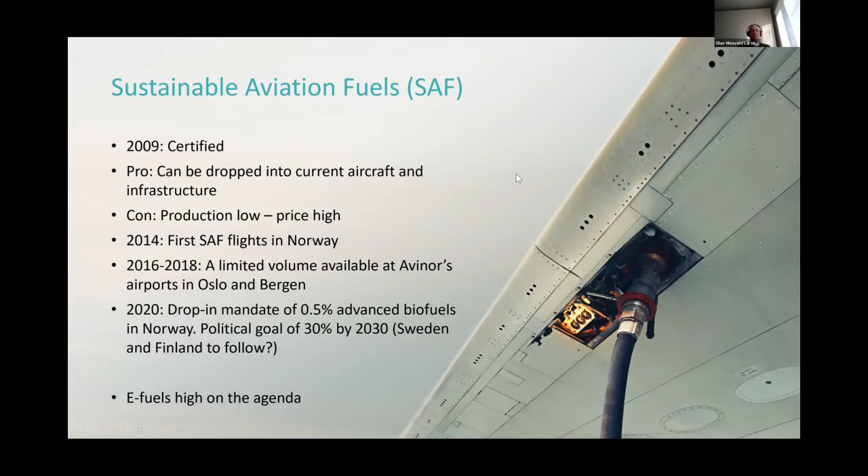So what do we mean by electrification? We have defined it as an aircraft with at least one electric motor for propulsion in the air. That electric motor will need to get its electricity from somewhere, and that could be either a fully battery electric

energy source. It could be variants or different types of hybrid solutions where you have both battery, but also some kind of generator based on liquid fuel.

And the third option that is getting more and more attention is adding a fuel cell, which is an advanced battery in many respects, running on hydrogen or some very hydrogen dense material, providing the electricity for the electric motor.

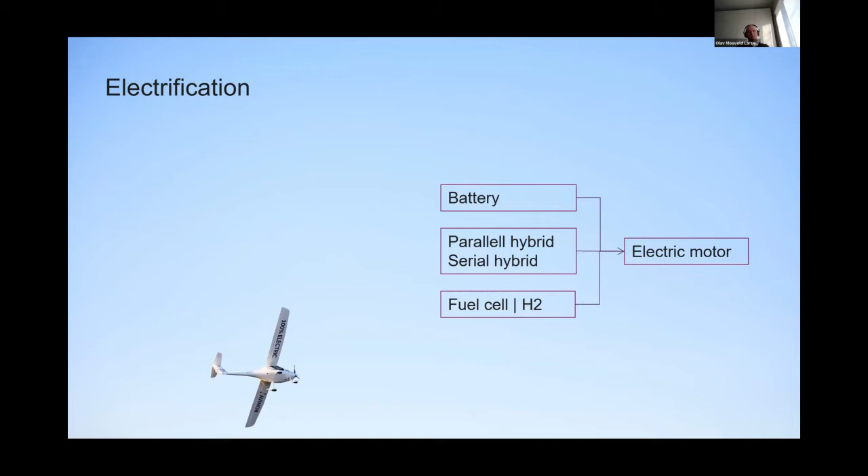We have been looking from Avinor's side into this since 2010, but more systematically, and spent quite a few resources on this since 2015. The reason for 2015 is that I think it was July that year

Airbus flew this little aircraft across the English Channel. That's a flight that's 72 kilometers long, and that's longer than many of the domestic flights on the short-haul network in Norway. So we realized that this could be an interesting technology path to monitor.

There are currently more than 200, as far as we know, projects around the world working on electrifying aircraft of all sizes and shapes. In the remainder of my part of the presentation, I will pinpoint some of these for you to get an idea about what is going on, the whole spectrum. But obviously there are many more I cannot talk about in this short speech.

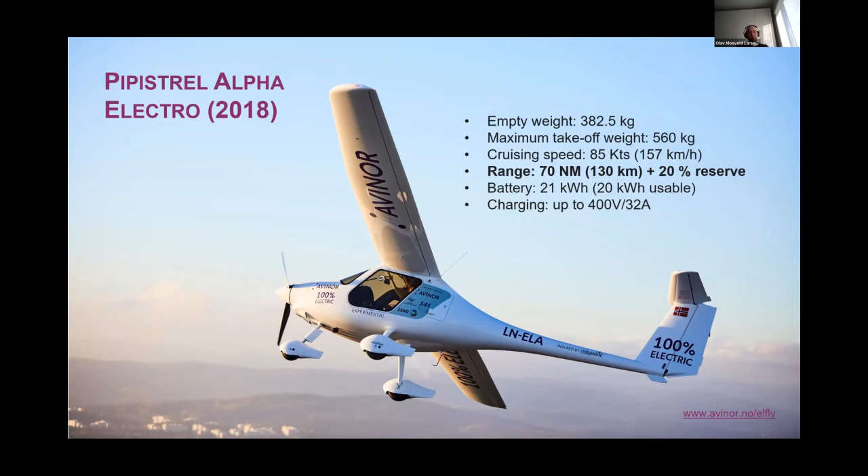So this is an example of an aircraft that is already flying. It's a 2-seat aircraft with a 130-ish kilometer range, but it's very light, and it is designed for training, pilot training, and also some recreational use. There are a couple of producers or OEMs in this domain, and this is also probably the segment where it is most easy to get these aircraft certified.

There are a lot of uncertainties here, obviously, but it is likely that what we will see first in regular passenger traffic is a 19-seater, and that has to do with the certification schemes. Up to 19 seats, aircraft looking maybe like this.

This is a Swedish aircraft designed in Gothenburg by a Swedish startup. It's fully battery electric, but it is also likely that one could see aircraft of this size and shape with, let's say, fuel cells, but still with fully electric motors, and they will have a quite limited range. That's what we expect.

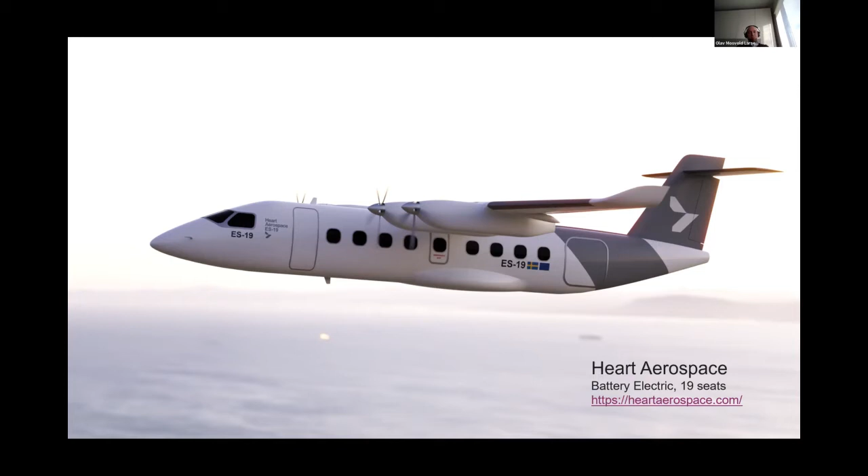Another example is a hybrid aircraft. This is a French producer, VoltAero. They are test flying their systems in a small aircraft on the right hand side of the screen. It is flying. It has both an electric motor and a fossil engine. On the left hand side is what they aim to actually produce in different versions, somewhere between 3 or 4 different models with 4 to 10 seats depending on the model.

As you notice, it's only one propeller in the rear of the aircraft, but that propeller is driven by a motor that has both electric and fossil power. So this is a hybrid solution, and the advantage with hybrid solutions is that they increase the range of the aircraft while we're waiting for batteries to get better.

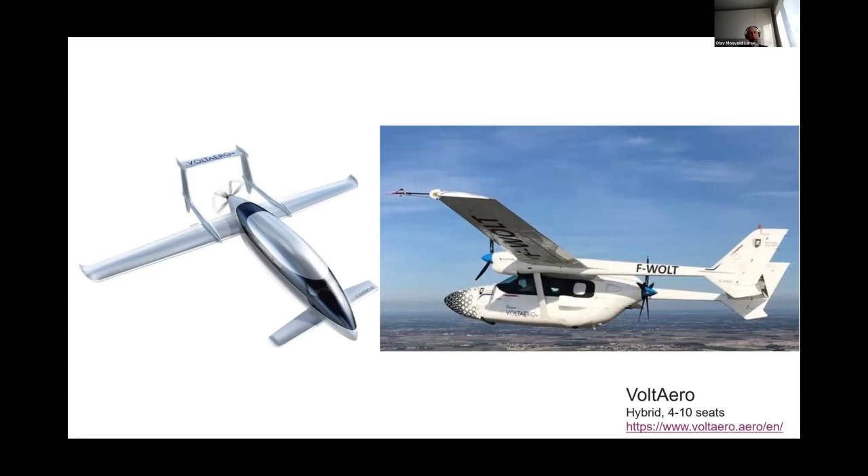What one could expect to see perhaps in the next 5, 6, 7, 10 years are relatively small aircraft certified for regular passenger traffic, perhaps with a range of up to 200-300 kilometers, depending on the battery development, as I mentioned, and also the design and the architecture of the aircraft.

And this is where hydrogen sort of comes into play. Hydrogen has been gaining a lot of attention and momentum in the aviation industry for the last, I would say, the last couple of years, and especially since summer. Mind you that hydrogen is a very convenient energy carrier.

It is already used in production of biofuels, sustainable aviation fuels, hydrotreating the fuels. It is vital in electrofuels that I mentioned in the introduction to this talk. But what we'll talk about here is hydrogen used in fuel cells, and then it will be what we've already defined as an electrified aircraft, and also coming up, direct combustion of hydrogen in jet engines.

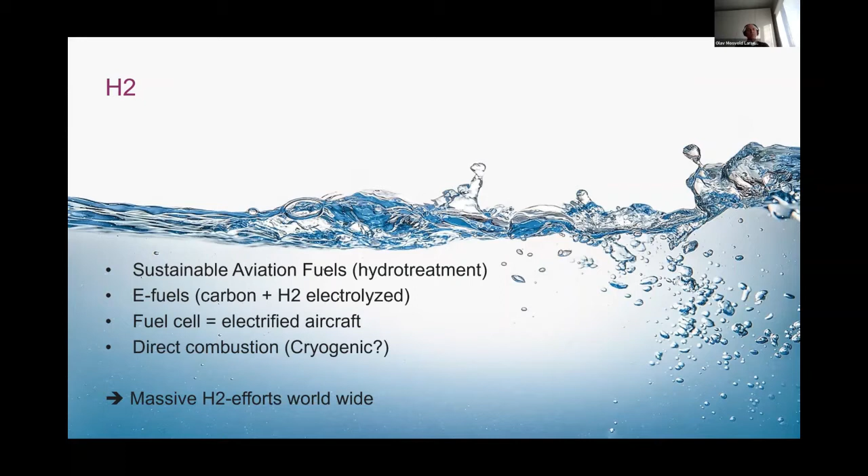ZeroAvia has been around for 3-4 years perhaps. We met them a couple of times. They are already flying a small Piper Malibu. They're originally from California in the US, and now based in Cranfield. And they flew with first battery electric to test their systems.

And this fall of 2020, they also started flying with a fuel cell as the energy source for the electric motor. It's a very exciting project, and it will, using hydrogen will also add, as I mentioned, range to these type of aircraft.

But what has maybe had a knock-on effect on a big part of the aviation industry is that Airbus, the European aircraft manufacturer, in September came out of stealth mode with their plans for a zero emission aircraft. They are stating that their goal is that this should be available in the market by 2035, so that's 15 years from now.

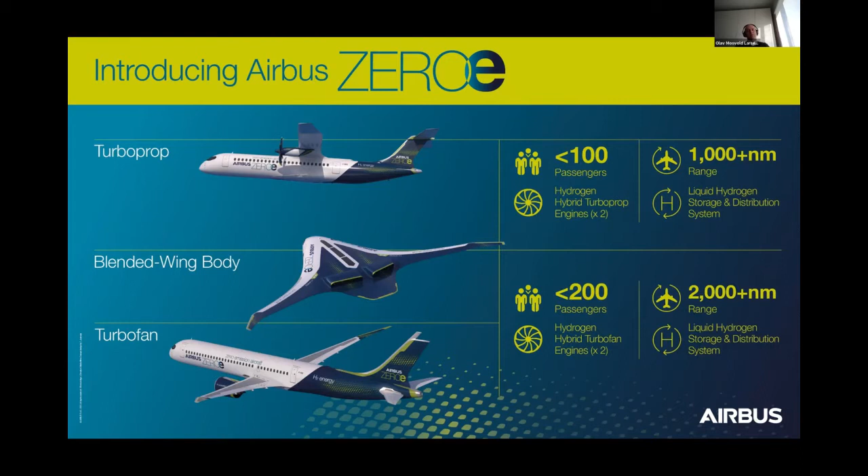So it will be totally emission-free, and it will probably also be a lot more quiet and emit less noise than the current technology today.

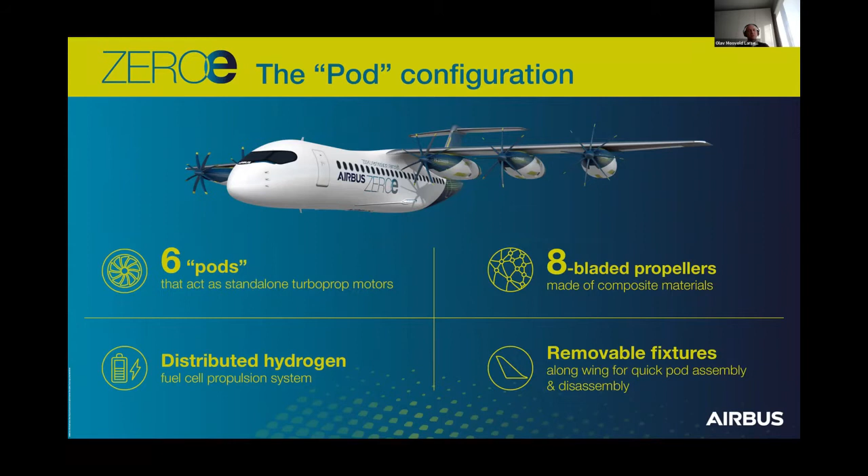Hydrogen has also been used in the space industry and also in the defense industry for a number of years. So there is quite a lot of experience in using hydrogen as an energy carrier.

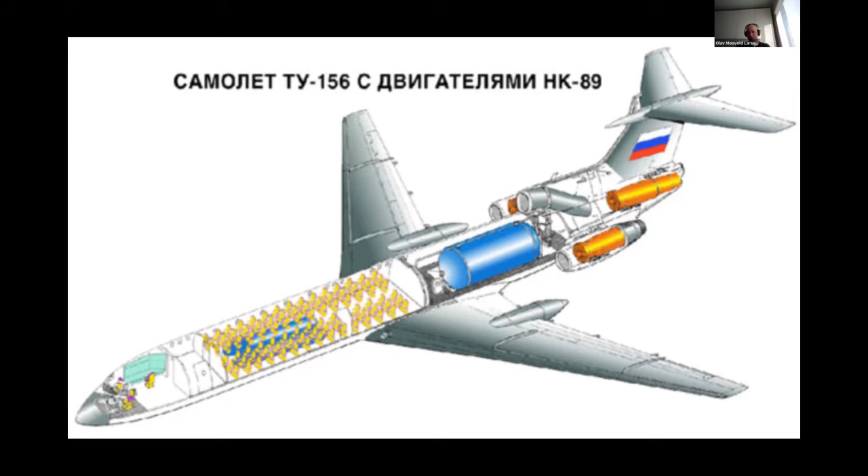This will obviously have consequences also for the airport infrastructure. From Avinor's side, operating most of the airports in Norway, we're looking into this and preparing for that development. We're looking into what will be the needs for charging, and also how supply and storage of hydrogen will affect our airport operations and planning for the future.

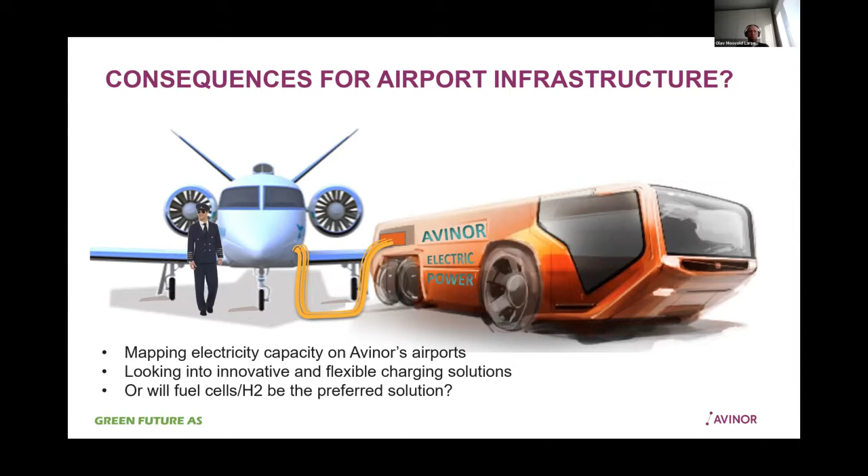Thank you, Olav. Then it's back to me, Jan Petter. What we wanted to do now is have a look at some of the key challenges, and also some of what we think is a way forward to improve innovation, speed and quality. We will go through some of these points. These are results of, I'd say, several years of work, but the last two years a lot of things have happened.

We have been doing reports, analytical work, both nationally and internationally, a lot of European-based collaboration. What I'll be talking about now is our summary, our total evaluation of what are the main issues. So we'll kick off by talking about the key challenges that we have identified. There are a number of issues, but these we believe are very significant.

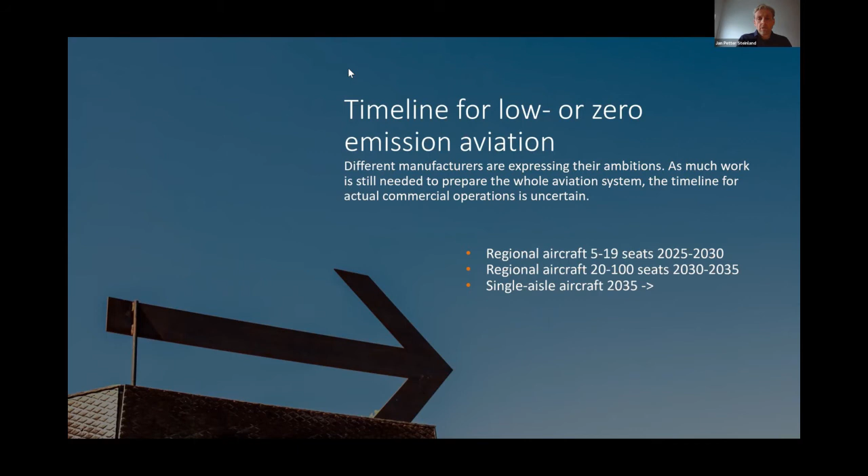And then we see that, for example, Airbus is saying that by 2035, they expect to be starting to be able to replace some of the 737s or the Airbus Neos, etc. So this is concerning the timeline.

All right, finally, some concluding remarks from our side. We of course appreciate the opportunity to talk to you today. We had discussion prior to this about what the concluding remarks should be, and the one obvious one is that the Barents region is totally dependent on aviation. It's not just Norway - there are long distances. We have a lot of joint challenges, and we need to keep a strong aviation system in this region. We know that the greenhouse gas emissions must be mitigated.

Yes, of course, most players - I would say many players in the aviation system today - are very concerned with COVID-19 and are focused on starting their business up again, or keeping it alive. But then as soon as things are rolling, and also due to more public support, more support from governments, the immediate concern then after that and in the following years will be the decarbonization, or reducing the climate impact.

Sustainable aviation fuels, as Olav said, it's already there. It can help us fill the gap until we have new technology implemented in aviation. The electrified passenger aircraft, whether it's on batteries alone, with a fuel cell, or other hybrid combinations, they will become reality. And hydrogen is today expected to be part of the solution. Every player we have talked to is also having hydrogen on their map and seeing this as part of the solution.

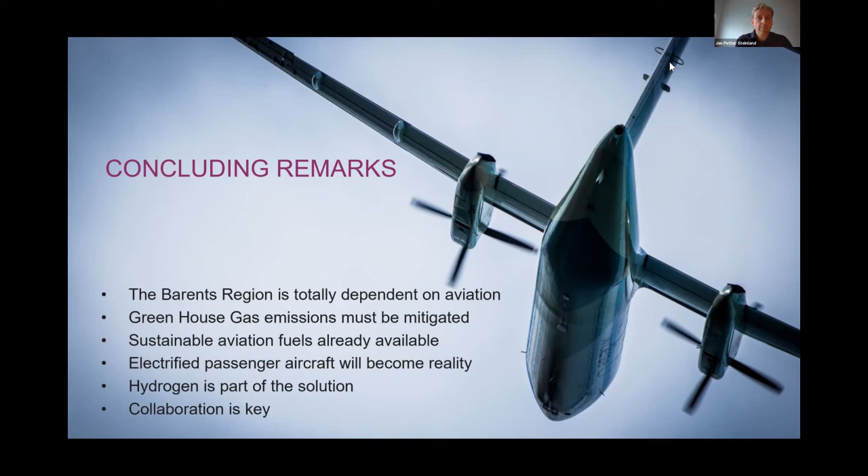And of course, I think the final word, if any, is that collaboration is key. And it's not easy - I think that may be the most difficult issue of all, is to find ways to collaborate that is effective and efficient, but it's definitely needed. So with that, I will say thank you for being given this opportunity today. Back to you, Paul.